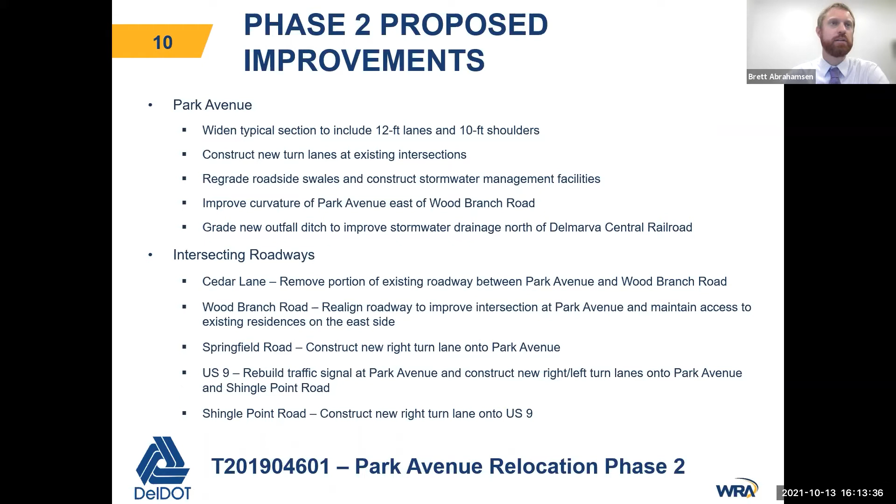Thanks, Ed. Good evening, everybody. As Ed said, I'm just going to take a few minutes to go through the project and highlight some key aspects of the improvements we're proposing for the Park Avenue Phase 2 project.

On this first slide, you'll see some of the improvements for Park Avenue. As Ed mentioned, we're proposing to widen Park Avenue. The typical section, which is basically a cut of the roadway viewed sideways, will include 12-foot travel lanes and 10-foot shoulders. We'll also be constructing new turn lanes at several existing intersections to remove turning traffic from the travel lanes and improve safety along the corridor. We'll be regrading the swales adjacent to the roadway and constructing stormwater management facilities to handle runoff from the pavement. We'll also be improving the curvature of Park Avenue east of Wood Branch Road.

This would be the severe curve that most folks are aware of, southeast of the airport. We'll also be grading an outfall ditch north of Park Avenue near US 9, which I'll provide more detail on shortly. As for the intersecting roadways, we'll be improving Cedar Lane and Wood Branch Road together to form a new realignment that provides better access to and from Park Avenue. At Springfield Road, we'll be constructing a new right turn lane onto Park Avenue. At US 9, we'll be adding new turn lanes and rebuilding the traffic signal. And finally, at Shingle Point Road, we'll be constructing a new right turn lane onto US 9.

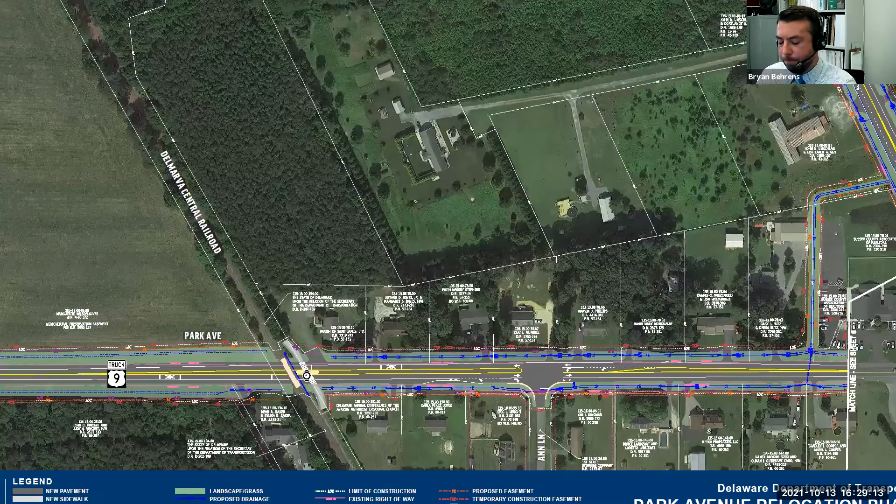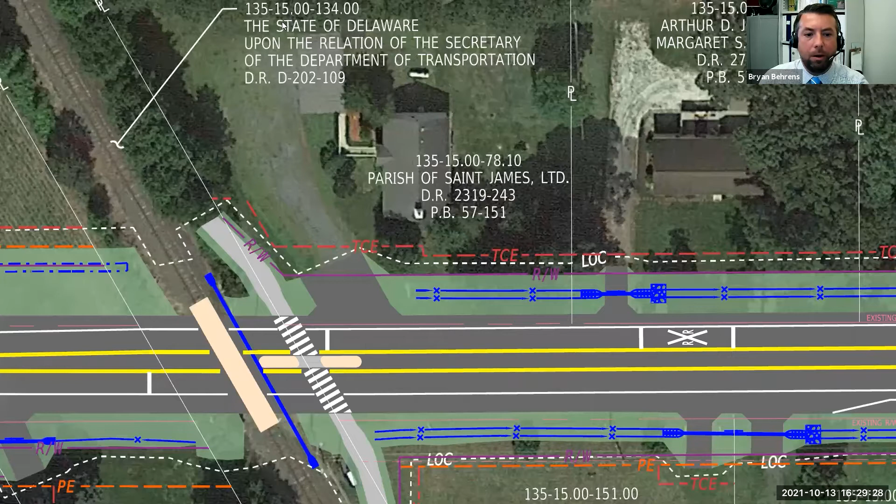So the refuge island - I don't know if you can zoom in at all on that, Brett - it does provide some refuge for folks who are crossing the street. DelDOT has been trying to put this in practice on a few of our crossings, more in the Lewes area recently, but they seem to be working. So that's the thought there - not a bridge, but more of a break in the concrete median to provide a place to stop.

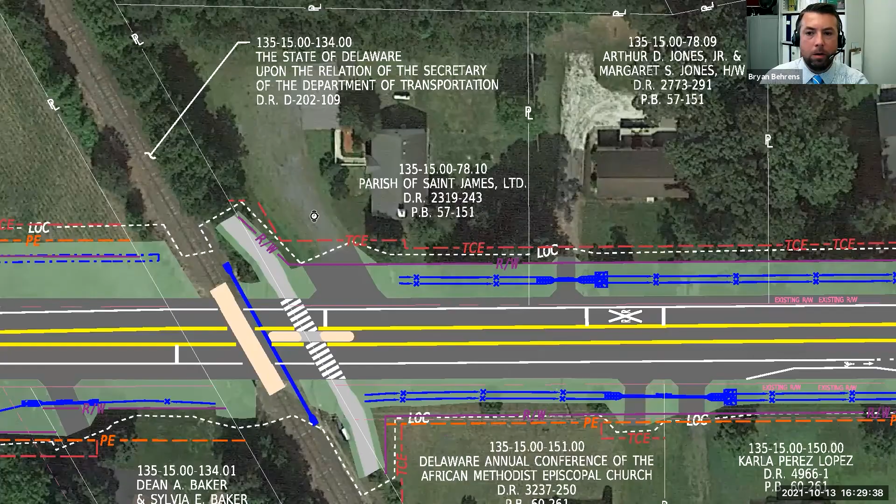Next question we have is, what is the size of the impact on my property at 233, at 65 Park Avenue? I'm going to rely on my team here, hopefully they have looked that up and can jump in - Brett or Ed. I don't know the parcel off the top of my head.

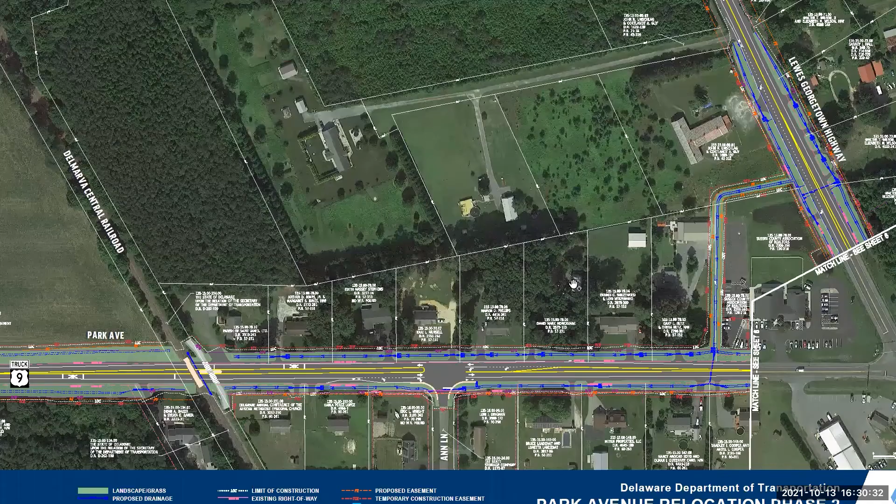Let me just pull it up here. I think that's the parcel, two properties south of the Realtor Association on the west side. Yeah, that's Dennis and Lori - Dennis, Winzenried, yeah.

The impact to the property would be widening to account for the additional shoulder width and turn lane, and then regrading. These blue lines here are open swales, so it'll just be basically a grass area that's depressed to allow drainage to be conveyed, conveying stormwater runoff during storm events. The limit of the green shade that you see here is the limit of the impact to the parcel. The driveway entrance would be impacted as well and tie into the proposed Park Avenue.

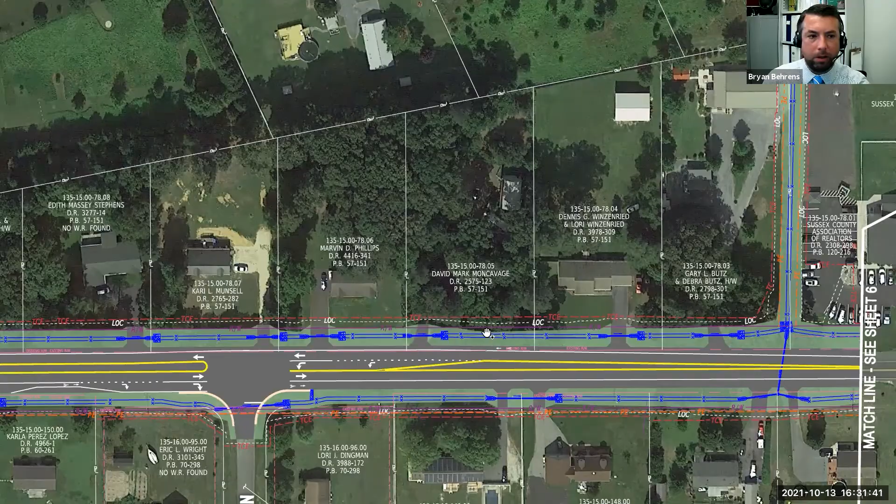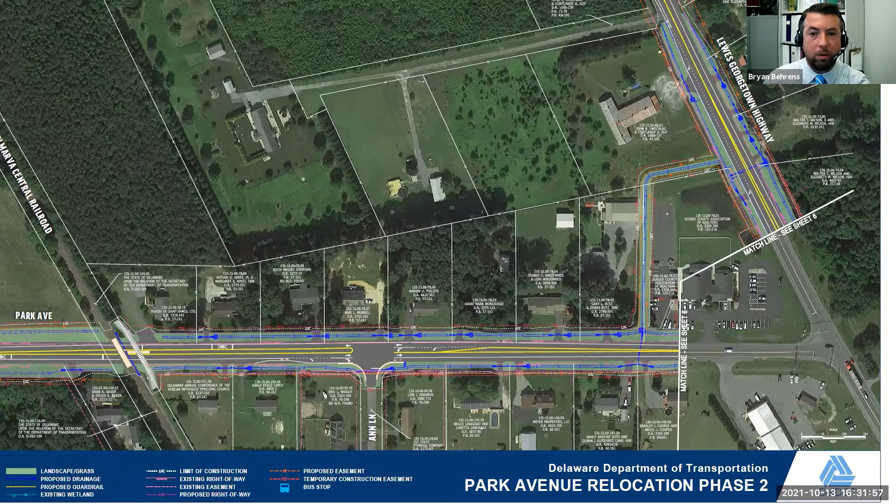I think there's a follow-up question - I don't mean to jump around, but I think it's the same person. The question is, it doesn't appear that the impact is equal north of the railroad tracks, the impact is shifted west - is that true? And what is the impact on properties on the west? I apologize if that's not the same person, it just shows up as a user on the Q&A.

There might be a slight shift to that side. We were trying to balance in this area - there are several wells and septic systems around here that we are trying to avoid and minimize impacts to as much as possible. This parcel we were just speaking about does have a well in the front yard, which we were able to set the alignment to avoid impact to. So that drove a lot of the location of the alignment in this stretch - it may not be completely equal, might not be exactly 10 feet this side and 10 feet that side, but we were trying to mitigate impacts as much as possible to all parcels in the area.

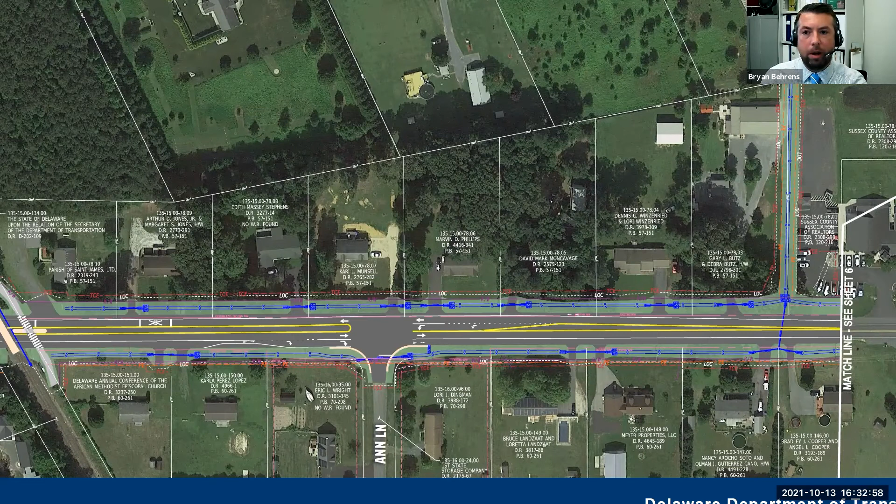Thanks, Brett. Okay, I'm going to go back down the line here. So why is drainage off Park Avenue making a left-hand turn as opposed to straight to Route 9? I'm assuming they're referring to the outfall ditch - yeah, right there.

I think it's primarily due to grades - this ends up being a slightly shorter route, and the problem with this area is it is very flat, so any little bit that you can make up the grade difference is going to help convey that runoff. We also run into issues with conveying past a stormwater management facility here for the Realtor Association - if we direct more water this way, that means we'd need to increase the size of the ditch, which could increase impacts there. So to mitigate that possibility, we rerouted it this way along the property line.

Thank you, Brett. There are a few similar questions here that I'll try to summarize. They mostly have to do with impacts to the sides of the road. Whenever we have a project where we have to widen the road, that's typically where we start, then we try to add in turn lanes in different places, and there are other specific impacts related to drainage or utility relocations needed as we go through project development. That tends to manifest in needing more property from one property owner versus another. The department makes every effort to go through that process mindful of those impacts, but inevitably it always goes that way where some property owners have more right-of-way needs than others.

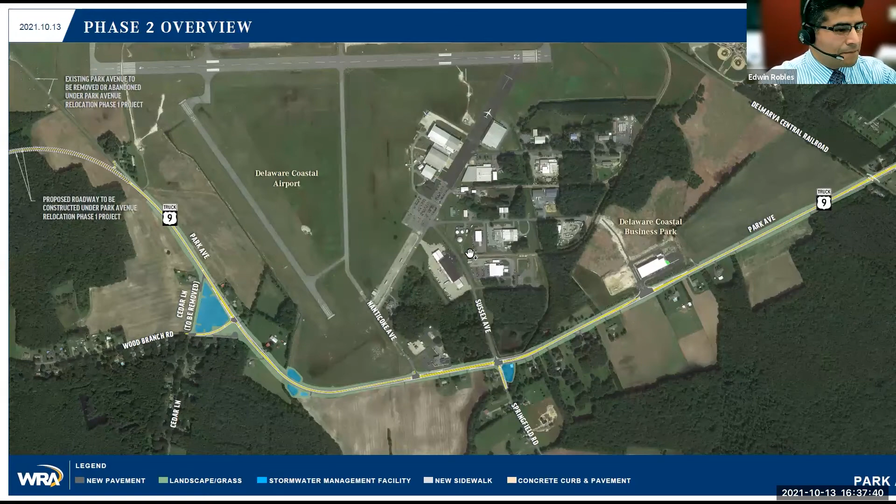Bryan, they might be having some technical difficulties, so they're working through that. In general though, that becomes part of the right-of-way negotiation and acquisition process. So if there's room to relocate those wells and septics, that's what happens. Typically, DelDOT is there with you through that process as far as the cost associated with it.

The next comment is this will greatly affect the amount of land farmers have available to grow their crops. We are certainly sensitive to that and try to do our best to minimize the number of impacts we may have on any given project, but we appreciate the comment.

Another question related to right-of-way: what will be the monetary compensation for property taken? Again, I'd defer—I don't know if Sarah, I see you've unmuted yourself, maybe you're available to answer this one. Still having some technical difficulties, it sounds like. In general, for each parcel that DelDOT needs right-of-way on, there is an appraisal process that typically compares property values in the area, and it's based on that. I'm certainly not a real estate expert, and we can follow up with you if you're interested in getting a more specific answer, but the specific amount I couldn't tell you today.

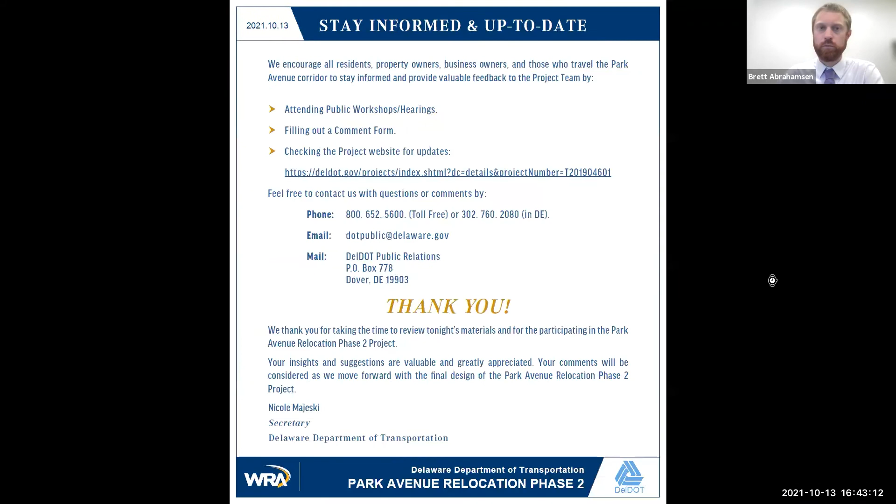Sure, yeah, there are several wells and septics that are being impacted. I think the ones that were most... spent the most time looking at. Here.

Several parcels, I'm not sure if this is one of the ones in reference. Several parcels up here have septics in their front yard. We were able to do some investigations and determine that those septics could be relocated, essentially switched with the wells, or the septic systems relocated to the backyards and the wells to the front yards. So I believe we were able to do enough investigation to determine that relocation would be feasible on any parcel that's impacted, and that would also be handled as part of the real estate process.

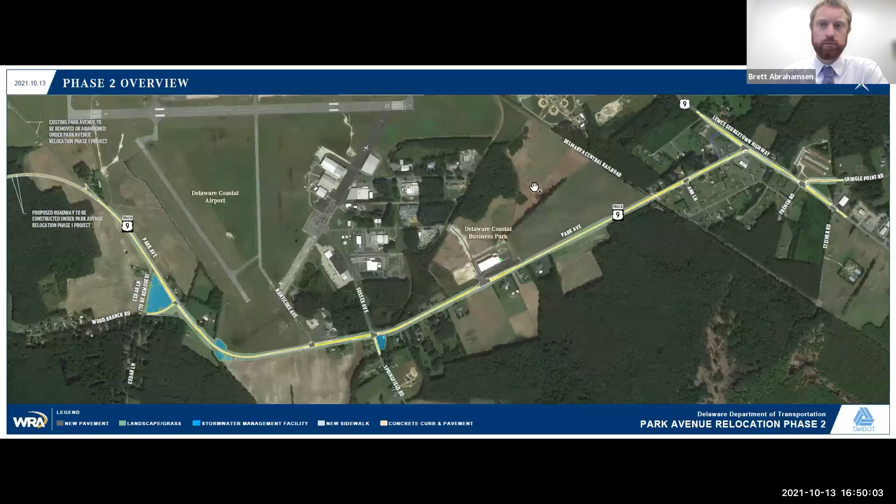The question is, I see that the movement of Route 9 and Park Avenue has remained the same. Is there a reason that was not adjusted to a more 90-degree angle as we've seen for Wood Branch and Park Avenue? Yes, the primary issue being impacts. In order to realign Park Avenue to come in at 90 degrees to US 9, which would be ideal, it would require impacts to parcels on either one of these corners. In comparison, at this location, DelDOT is actually looking to acquire this parcel in total for a stormwater management facility. So since DelDOT would already be owning the property, that's why this became a viable option to relocate Wood Branch Road.

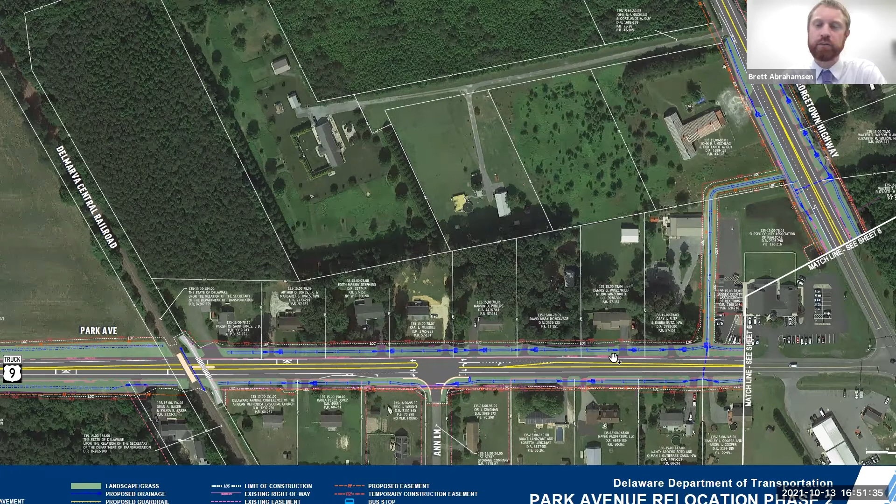And then I'll take Dennis's question as well. Dennis, you're asking for actual dimensions on the drawings of where the road surface, swales, and right-of-way fall, and whether the measurements are from the existing center line of the road. We can certainly provide measurements between any two points, but I think we're getting into some specifics that will be difficult for us to scale here with what we have available for this meeting. So that might be better suited for a one-on-one meeting, as Bryan mentioned.

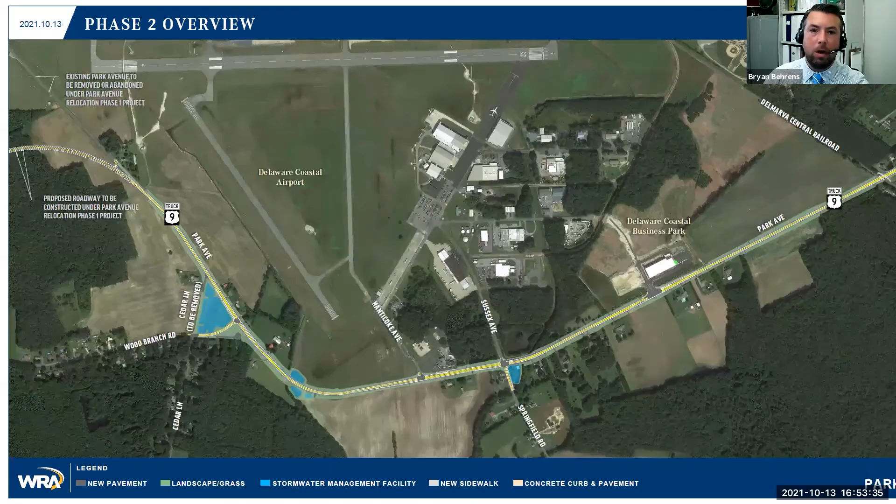Got one more question from Anne. So this appears to be a larger project than initially presented a few years ago. It's about the same. I think the biggest change we've made is probably at the bookends of the project, where we're realigning Wood Branch and changing up the Wood Branch Park Avenue triangle, if you will, which we weren't really doing before. That had more to do with some stormwater management design. And at the other end, we've added the shingle point intersection, which was also not in the original concept. So yes is the answer, but other than that it's mostly still the same project. A few turn lane additions, things of that nature, but the scope of widening to provide a better truck route is still the same. The overall project of providing a more direct truck route between 113 and Route 9, with both phases of Park Avenue, is still very much the same. But good question, thank you.

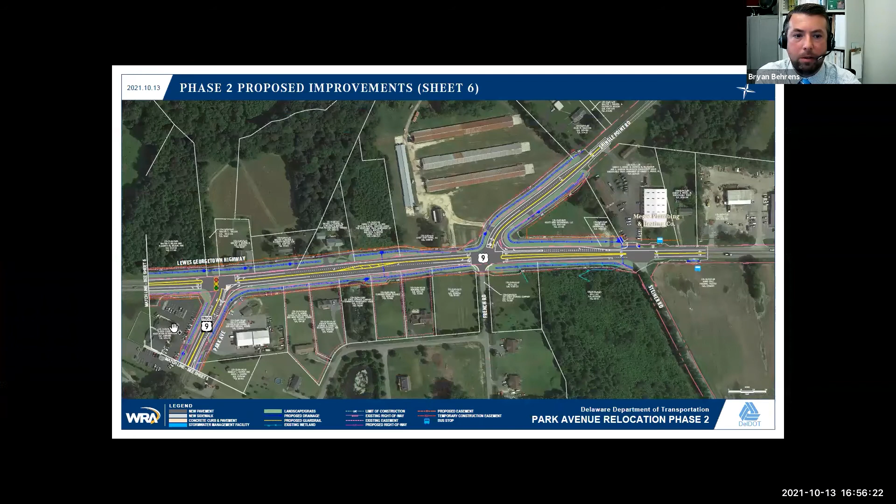We have another question from Patricia. So two properties at the corners of 9 and Park are commercial. Have considerations been made to the economic impacts to each property? It appears there's some additional negative impacts to one over the other. How is this justified? I see Sarah is typing an answer. Thank you, Sarah, but I'll try my best to answer from a project engineering perspective. The access to those properties is largely the same, and the impacts have more to do with cleaning up the drainage patterns in the area, and much less with taking away access or things of that nature, which is often where economic impact conversations come from. But I'm not sure, I'll let Sarah finish her response here. That's our approach - access is largely unchanged as a result of this project, and beyond that I'm not quite sure of the type of response there.

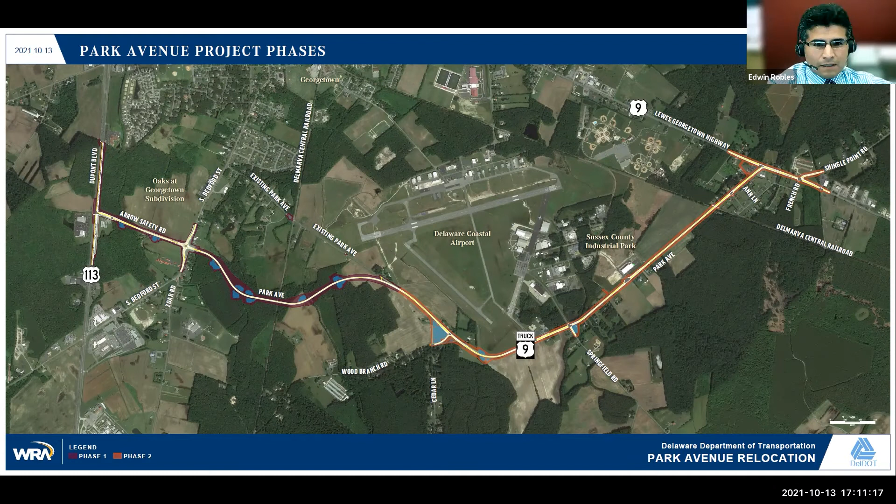Okay, so I received an email a few minutes ago from someone asking: someone came to the door and I missed the information about how we would be compensated for property taken. Could you please explain? So our real estate group provided a response saying basically we would have an appraisal done and reviewed, and an offer would be presented to the specific owner of that property. At that time, the owner would have 30 days for review, and afterward negotiations between DelDOT and the owner would begin. So there you go, that's the answer for that question.

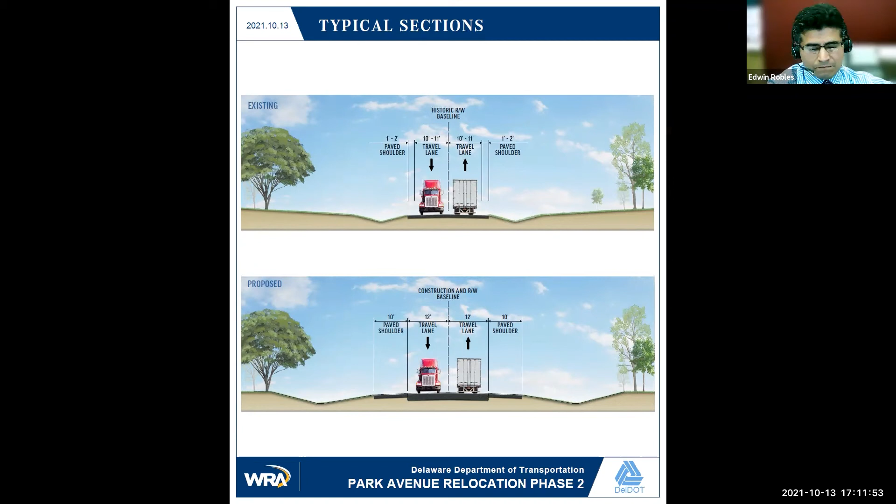Okay, we have another question from Ann. The question is, the project has expanded into a major highway. Is the plan to ultimately turn all of Park Avenue into one large industrial park?

So DelDOT, beyond this project, looking into the current CTP, doesn't have any more projects on Park Avenue other than phase 1 and phase 2. The county does have some projects related to the business park, the industrial park, and associated with the airport, but DelDOT, beyond this project, this is what we have planned for Park Avenue at this time. Thanks.

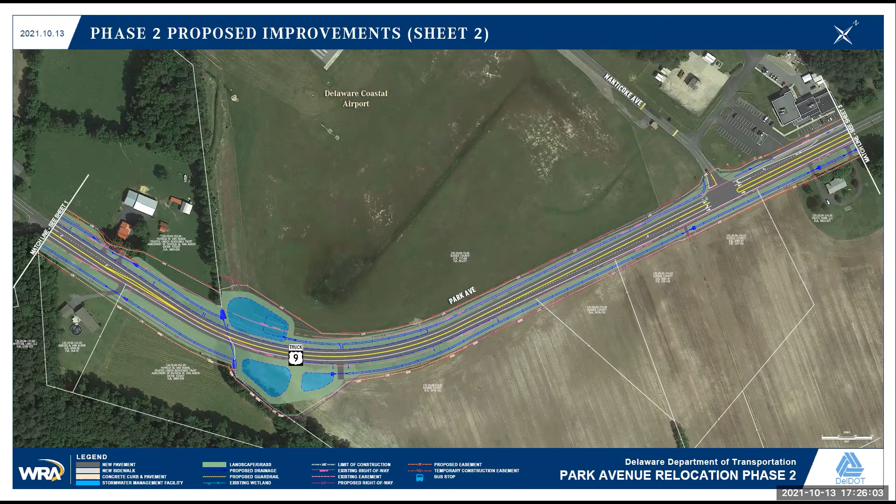So we have another question about this. What's the posted speed limit going to be on Park Avenue? And that will be 45 miles per hour. As far as enforcement goes, it won't be anything other than what is traditionally there today with just the posted signs and then police presence monitoring those speeds.

And I should clarify the previous question about other projects in the area. Back on phase 1 towards Route 113, it's not in the planned CTP. It's not in the current CTP, but it is planned as part of the US 113 overall north-south study, to have a grade separation and overpass at 113 and Arrow Safety. But again, that's not a project that's in the CTP yet, but it is something that is planned for the future at some point in time. But nothing on Park Avenue. Thanks.

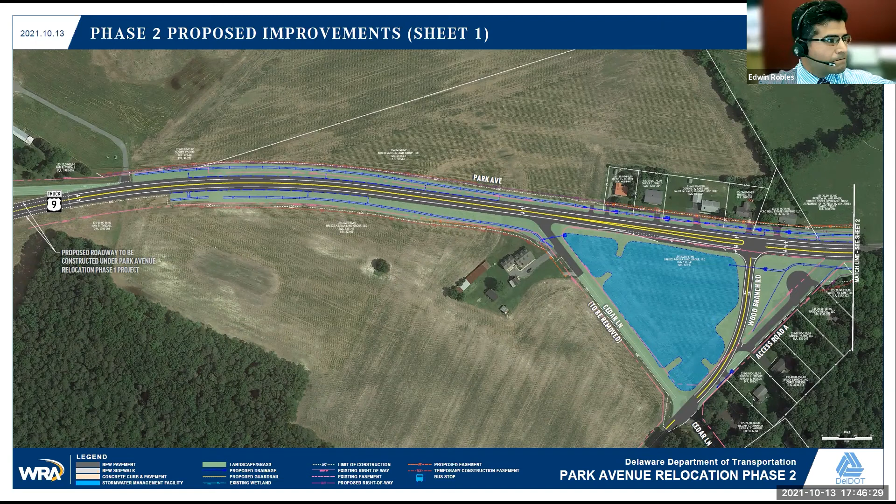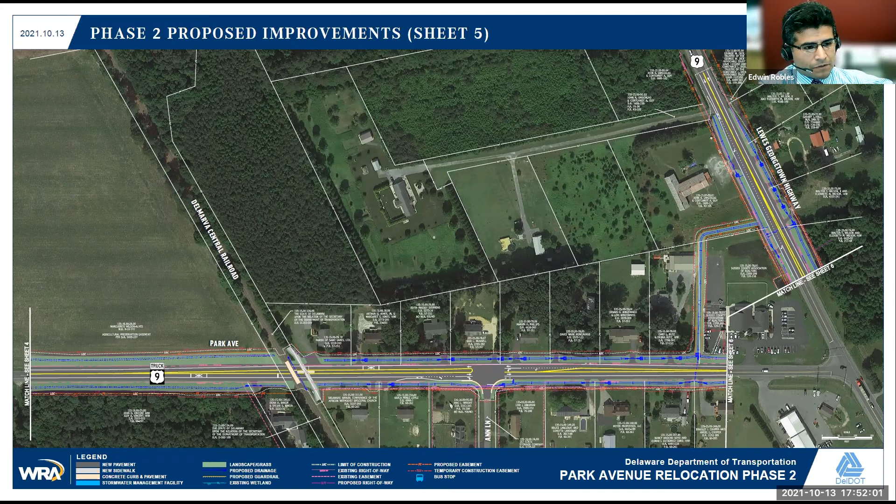All right, it looks like we had another question come in that was answered by our real estate folks, but I'll read it out loud for everyone's benefit. One of the questions was, will there be advanced property acquisition? Some may need to be relocated, and this will take time and money. The answer was, any relocations will be appraised, acquired, and relocated first. All right, thank you.

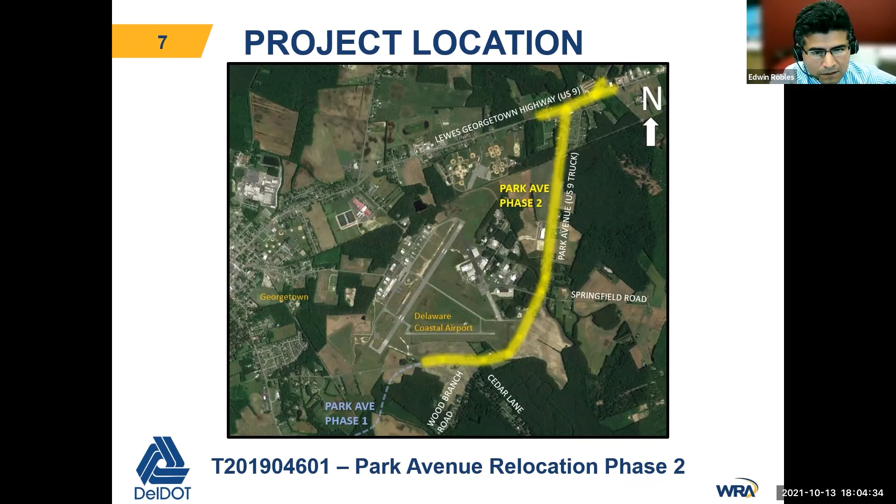As far as the project purpose and need, DelDOT's Capital Transportation Plan, commonly referred to as the CTP, recommends upgrading the US 9 truck bypass around Georgetown with appropriate turn lanes and signalized intersections, as well as realignment of the US 9 truck bypass to provide a continuous truck route from east along US 9 over to the west side of Georgetown onto US 113.

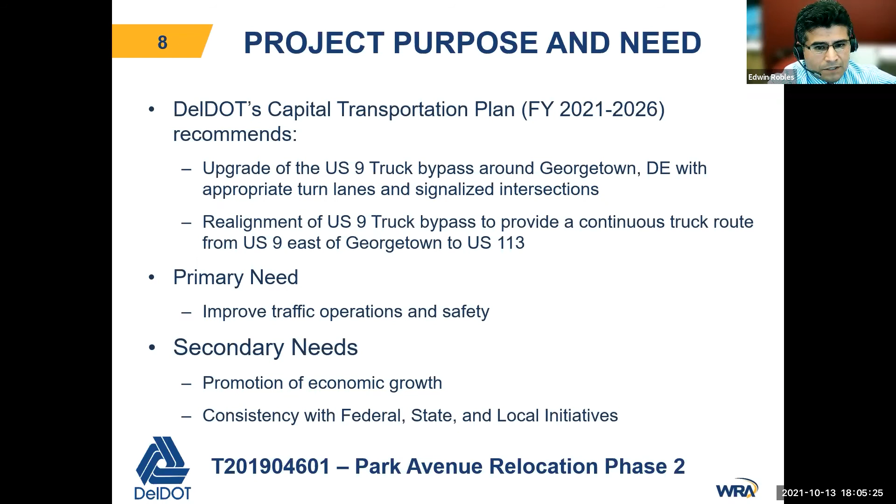The primary need is to improve traffic operations and safety, as well as a secondary need being promotion of economic growth and consistency with federal, state, and local initiatives.

A few years ago, the department decided to split the Park Avenue Relocation project shown here, which expands from 113 all the way out to US 9. The reason for that was to expedite the design, construction, and timing of construction.

This slide shows the limits of each project, with Park Avenue Phase 1 limits shown on the left side of the page, highlighted in the brown or maroon color, and Phase 2 project highlighted in the yellowish color on the right side of the page.

In the following slides, Brett will provide a more detailed explanation of the road improvements proposed by the Phase 2 capital project. So that being said, I will now turn it over to Brett.

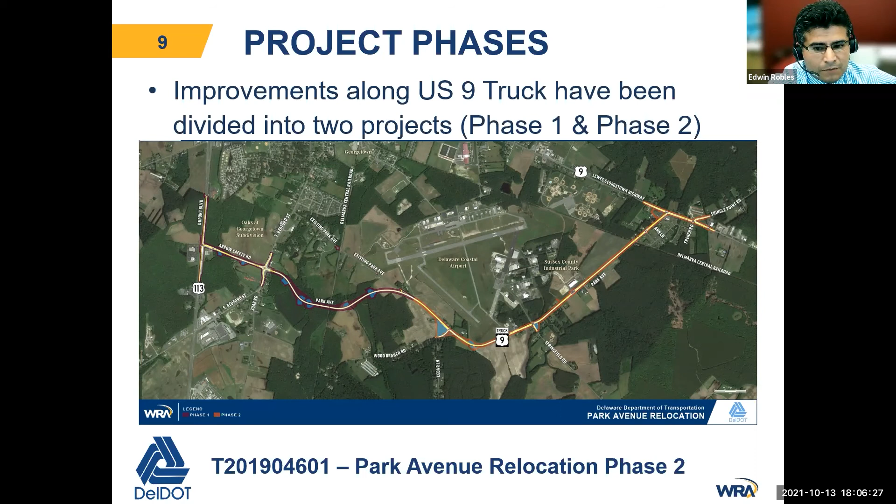I just want to go over some of the details of the design and what's being proposed. Along Park Avenue, we are proposing to widen the typical section, which essentially means if you were to take a cut of the roadway and look at it from the side, what the section would look like. The section is being widened to include 12-foot lanes and 10-foot shoulders.

We'll also be constructing new turn lanes at the existing intersections to improve safety by removing turning vehicles from the main travel stream. We'll also be regrading roadside swales and constructing stormwater management facilities. This will serve to better convey and control stormwater runoff from the roadway, and also improve safety by regrading the slopes coming off the shoulders.

We'll also be improving the curvature of Park Avenue east of Wood Branch Road. I'm sure many folks are aware there's a curve there that's more severe than some of the others, so we'll be improving the curvature there. We'll also be grading a new outfall ditch to the north of the railroad tracks to better drain that area. I'll get into some more details on subsequent slides.

Intersecting roadways that will be improved: Cedar Lane and Wood Branch Road. We're looking to remove a portion of Cedar Lane and realign Wood Branch Road to better intersect with Park Avenue. Springfield Road will be widened to construct a new right turn lane onto Park Avenue. At the Park Avenue and US 9 intersection, we'll be rebuilding the traffic signal and constructing new turn lanes, and also constructing turn lanes at and onto Shingle Point Road.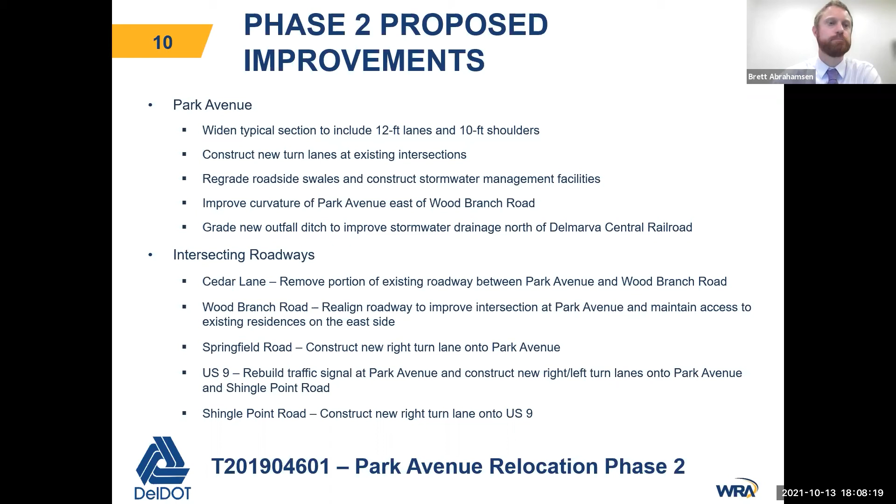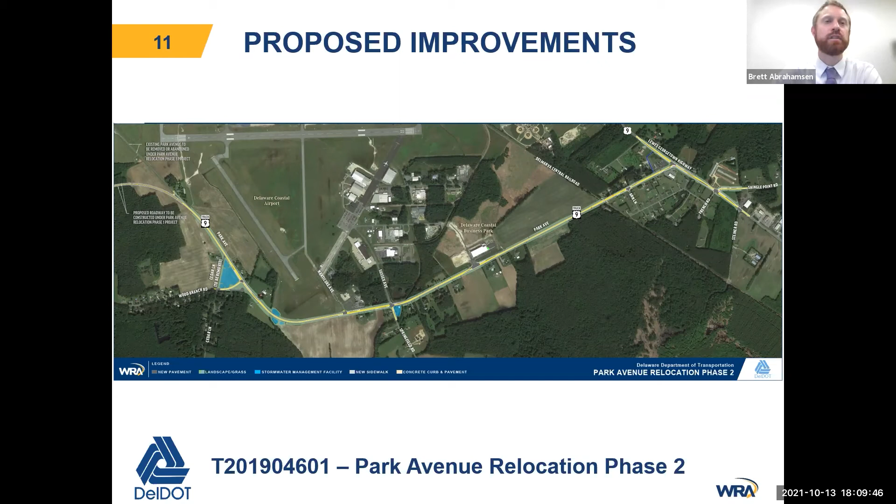Now I'm going to walk through a more detailed view of the project, to give some more specifics on what's being proposed.

Starting at the western limit of the project, you see the Park Avenue Phase 1 roadway tying into the existing alignment of Park Avenue. Park Avenue Phase 2 will be mostly on alignment, meaning the proposed roadway will generally follow the existing footprint of the existing roadway, just a little bit wider. There is one exception, for the curve, which we'll get to on the next sheet.

The major upgrade will be in this triangle formed by Park Avenue, Wood Branch Road, and Cedar Lane. Existing Cedar Lane runs right along here, and existing Wood Branch Road runs right along here. What's being proposed is to realign Wood Branch Road to come into Park Avenue at more of a 90-degree angle. The reason is the skew of these intersections is not ideal from a safety perspective, as far as sight distance goes when making turns, as well as the turning maneuvers themselves, which are more difficult with angles like this.

The 90-degree intersection is more desirable. We will be maintaining access to all homes along existing Wood Branch Road, either directly, as shown here with these two entrances, or via a new access road and cul-de-sac, which will generally follow the old Wood Branch Road alignment. This portion of Cedar Lane will be removed, so all traffic heading from Park Avenue to the south will utilize the new Wood Branch Road alignment. This portion of Cedar Lane will remain to provide access to this residence adjacent to Park Avenue. We're also proposing a stormwater management facility in this triangular parcel formed between the roadways.

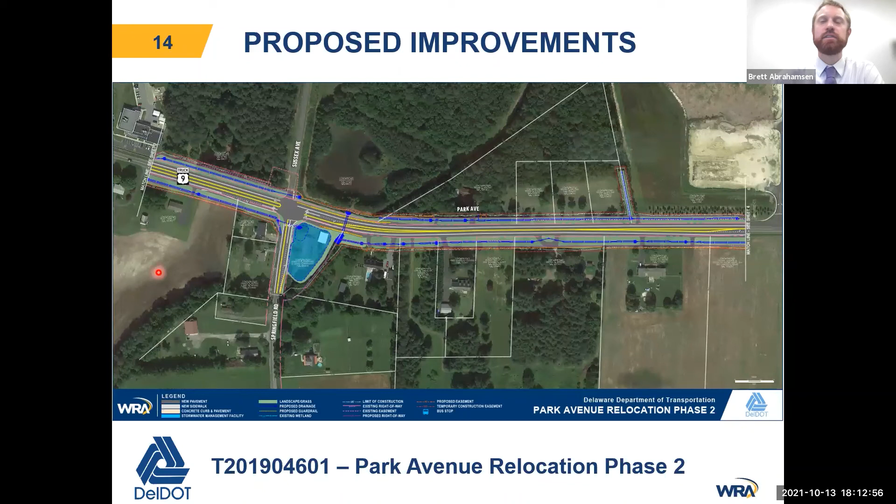Continuing north, we get to the Park Avenue intersection with Springfield Road and Sussex Avenue. Sussex Avenue today is gated with restricted access, and there's a longer airport fence running along here. That fence will be relocated outside of the limits, and the gate at Sussex Avenue will be maintained, so access will continue to be restricted. This intersection will continue to function as a T intersection between Park Avenue and Springfield Road. We are proposing turn lanes into Springfield Road, both right and left, and along Springfield Road itself we will be widening to have separate left and right turn lanes onto Park Avenue.

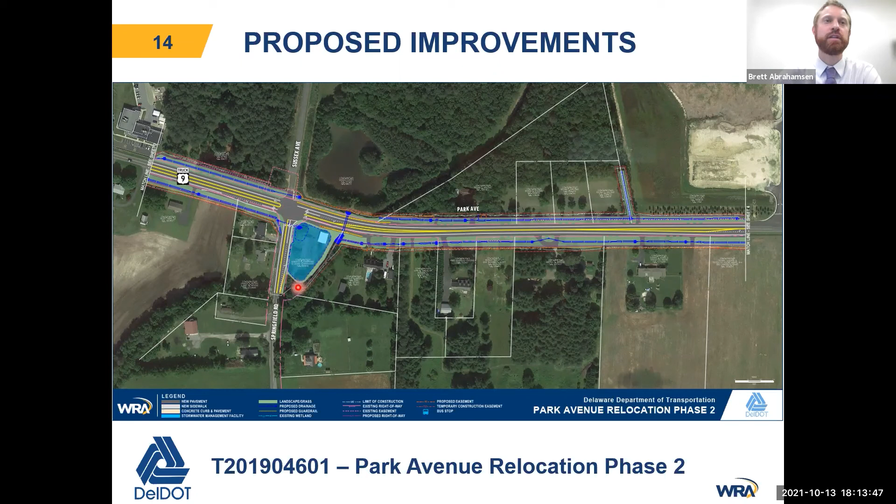Here we have a proposed stormwater management facility, again to control stormwater runoff in this area, which will outfall into the Peterkins Branch ditch running along this tree line. A 60-inch pipe culvert crossing Park Avenue will also be extended to maintain existing drainage patterns, accounting for the proposed widening of Park Avenue. Finally on this slide, there will be a short portion of existing ditch along the property line here, which will be regraded to better convey runoff from the roadway through these roadside swales.

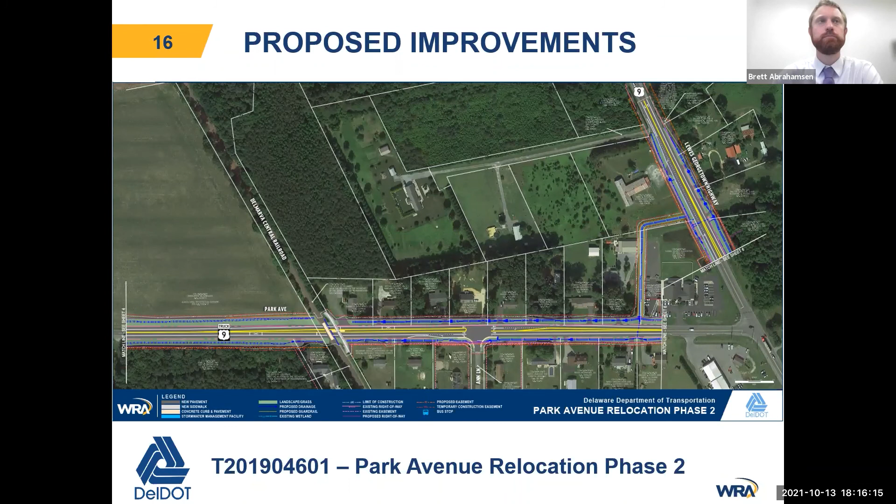On this final slide, we get to the intersection of US 9 and Park Avenue, as well as US 9 and Shingle Point Road. At US 9 and Park Avenue, we will again be adding turn lanes for all movements, including the eastbound right, westbound left, and both left and right turning movements from Park Avenue. For the right turn from Park Avenue to eastbound US 9, we will also add an acceleration lane, since this is the tie-in point for the US 9 truck route. This acceleration lane gives trucks and passenger vehicles a better opportunity to accelerate and safely merge with traffic. Due to the widening, the signal will also be rebuilt at Park Avenue and US 9.

At US 9 and Shingle Point Road, this intersection will remain unsignalized, but we will be adding turn lanes for the eastbound left and westbound right, and the Shingle Point Road approach will have separate left and right turn lanes. Finally, at the eastern project limits, there are two existing bus stops. We will be improving those by adding concrete pads adjacent to the shoulder to improve transit facilities in this portion of US 9.

So with that, I will turn it back over to Ed to discuss project schedule.

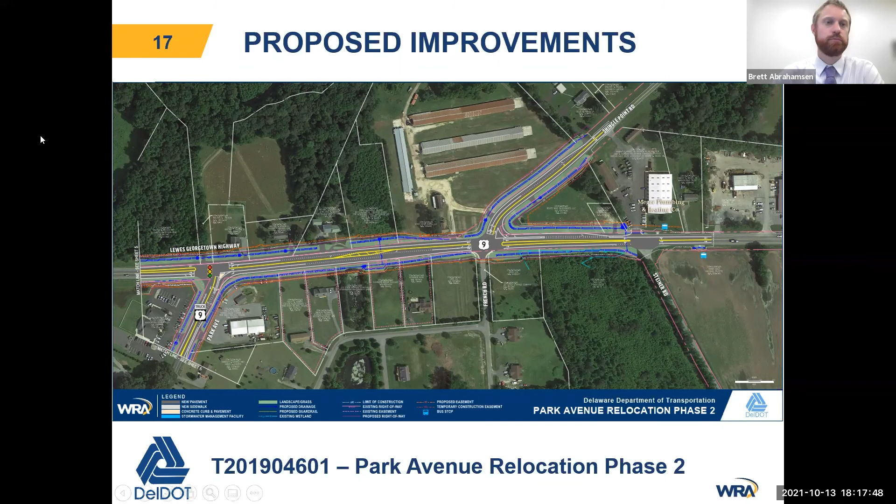And that brings us to the end of our presentation.